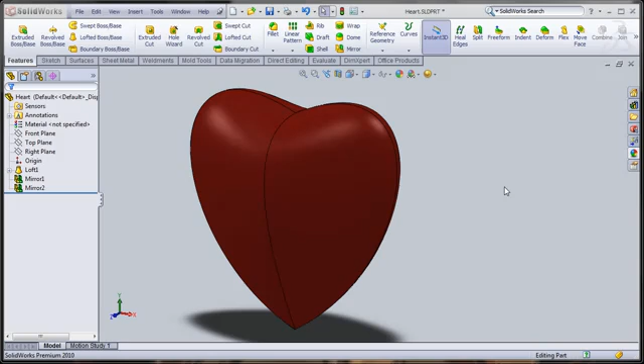Hello everybody. In this tutorial we're going to explore a feature tool called Lofted Boss/Base, and we're going to make a heart using Loft.

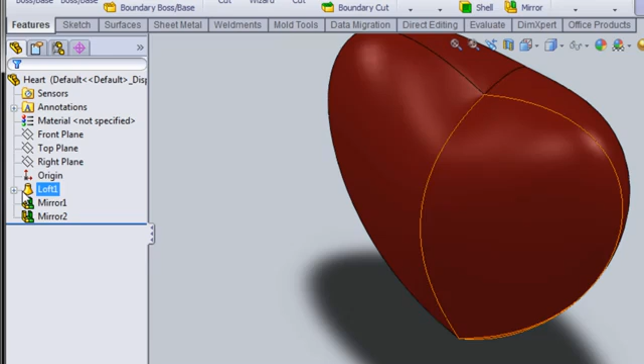As you can see, this heart here, notice when I hover my mouse over it, it really shows four different paths. As you can see on my feature tree, I have a loft, one mirror, and a second mirror. So if I suppress the first mirror, you can see the half heart, and if I suppress another mirror, you'll see only a quarter of the heart, which is nothing but a loft.

So this is the strategy that we're going to apply here. Let's take a look at how we do that.

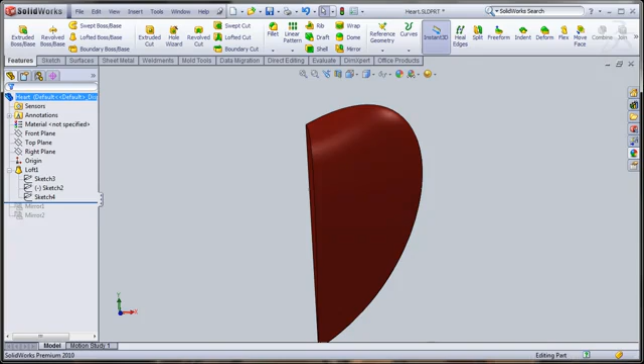I'm going to go to window. Let me just close this real quick. Go to window, and I have another part ready. Mainly in this tutorial we're going to use a front plane and a right plane. So I'm going to go front plane, and I'm going to say sketch on it.

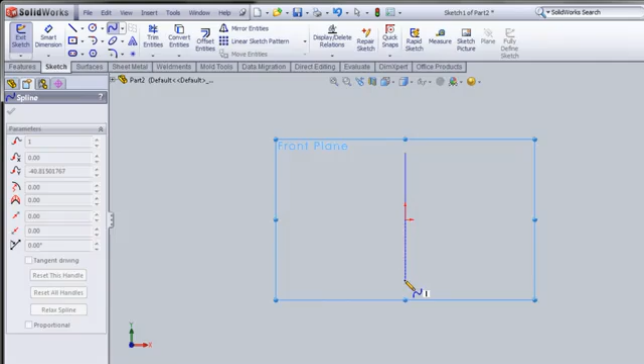Now I'm here. We're going to start with the spline tool on the top. I'm just going to draw one simple line here, and when I'm here, you see this little detail. I'm going to start pulling it like the Adobe Illustrator or Photoshop tool. I'm going to make it a little up.

Same thing I'm going to do here, like this guy too. Now in between this, I'm going to make, sorry, no center line, I'm going to make a regular line.

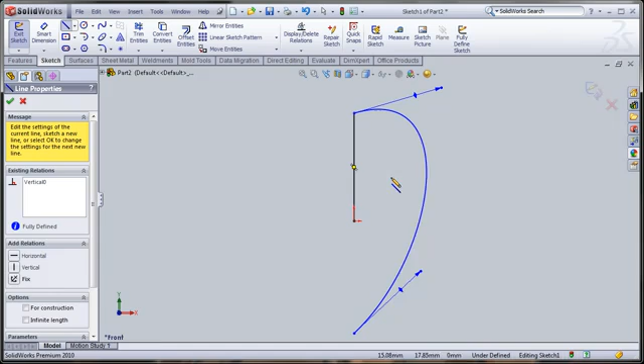Then I'm going to go right here, and we'll try to make a straight line, and there's another line. It doesn't have to be two separate lines, it could be one line straight up from here to here. I just want to make sure that it's straight and vertical.

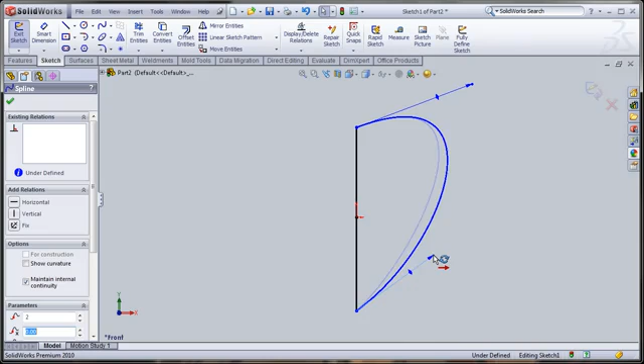Now the first part, you can take this little up here. I'm going to take a little up, and I'm going to make a little soft, gradual curve. That's one.

Perfect. Now if I make my front plane visible, we can see that we have one part of the heart shape on the front plane.

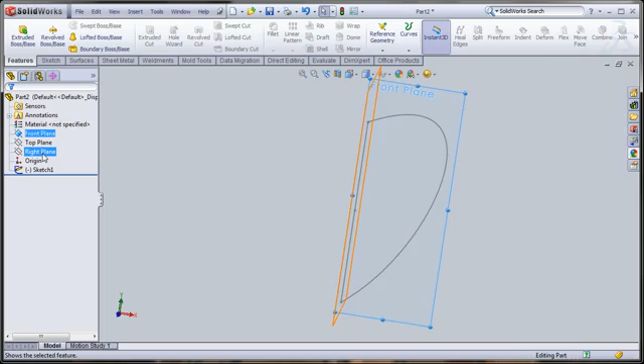Now I'm going to click on a right plane and sketch over here. This time I'll try to hide the front plane first and make the right plane visible. We're here now.

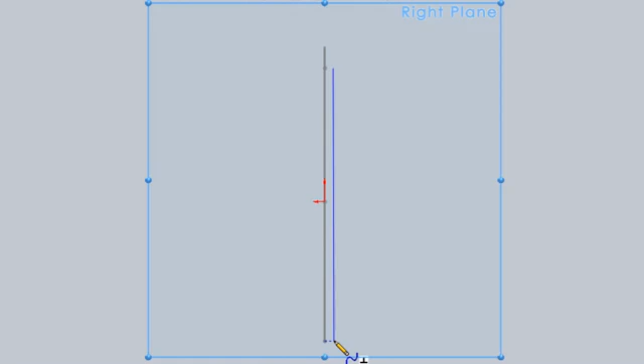I'm going to do exactly similar steps, but I'm going to start from a little away so I can avoid any accidental relationships that may develop. So I have this line created, and I'm going to select this line, holding the control button, and another two lines. Remember that line is from a previous sketch, and we are drawing a second sketch right now.

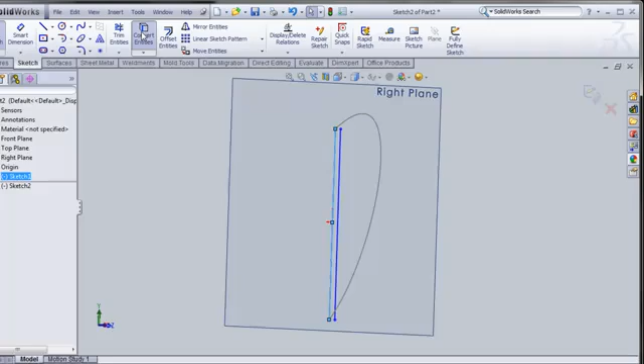I'm just going to use convert entities to bring it to this plane. Click OK. Seems like it brought it up for us. Just to double check, I'm going to hide it, and you can see we have this line ready for us.

Now I'm just going to click on the point here, click on the point here, and I'm going to say merge.

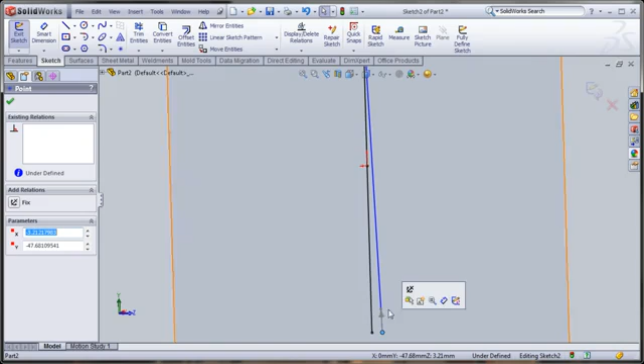Just going to do a similar thing. Before I do that, I'm just going to pull it out so it won't hide down there. Just click on merge, click OK, and now this time I'm going to make this line horizontal.

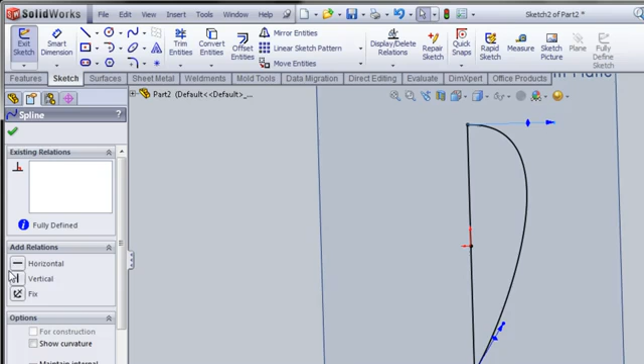So see, I'm clicking on this little handle here, first point, and I'm just going to add a relationship to that point, and it's just going to be horizontal. So it's there. Now I'm going to play with this a little bit.

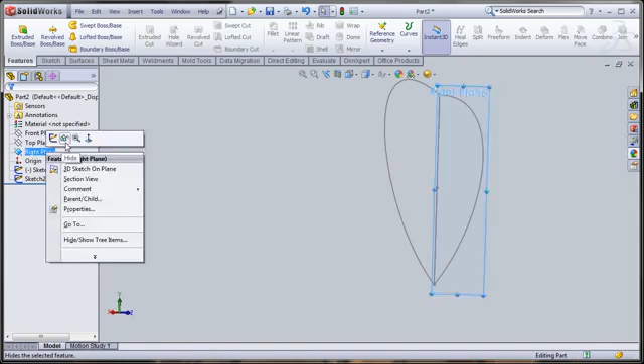Perfect. So as you can see here, let me turn on sketch one. You can see we have two different sketches, one on the front plane, one on the right plane, and it looks like this. Both the sketches have a closed profile.

Just remember, I'm just going to hide each sketch one by one so you can see this has a closed profile. Now I'm going to make it visible, and I'm going to hide sketch two. This has a closed profile as well, so make sure you have a closed profile to prepare a loft.

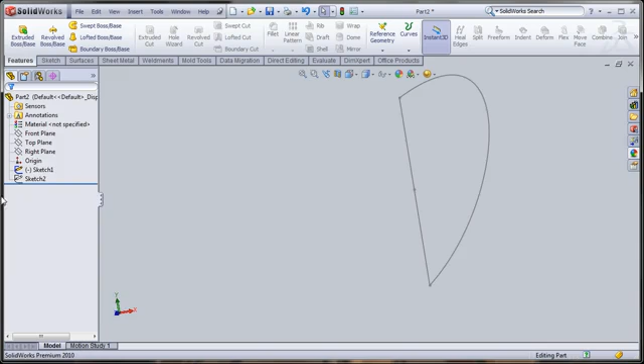In this case, now I'm going to turn on sketch two, and now I'm going to go and make a sketch on the top plane.

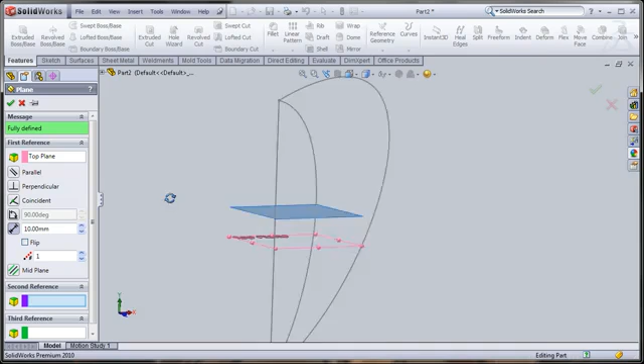I'll make a plane a little above the top plane, just so I have a better guide curve. So I'm going to go to reference geometry, plane, and use offset, and 10 millimeters seems okay to me. I'm going to click on sketch.

Now on the top plane, I'm just going to draw a spline here as well. We'll start from a little distance so I don't make any unwanted relationships on both sides. It may look like a little triangle.

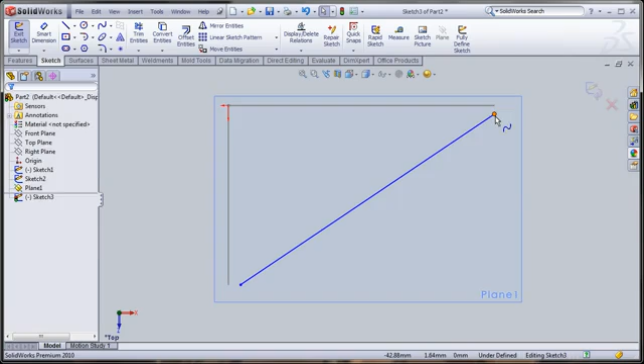Now I'm going to click on the point, holding the control button. I'm going to click on the spline, and I'll have a pierce relationship popping up on the left side. I'm going to add a pierce.

Don't freak out because it's not at the corner. It's exactly meeting the spline on the top plane, or plane 1, which is parallel to the top plane. So I'm going to do exactly the same thing, holding the control button. I'm going to select this spline and the point here, click on the pierce relationship, and click OK.

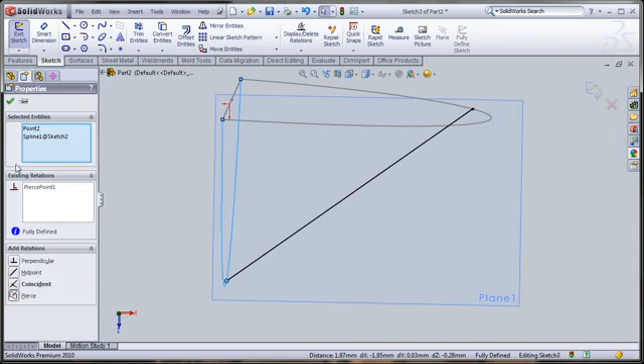Once I'm here, I'm going to click on the point, and you see these gray bars right here. There we go. I'm going to pull them and make this vertical. So that's vertical. I'm going to click here and make this horizontal. I'll just adjust it a little bit so it comes out smooth.

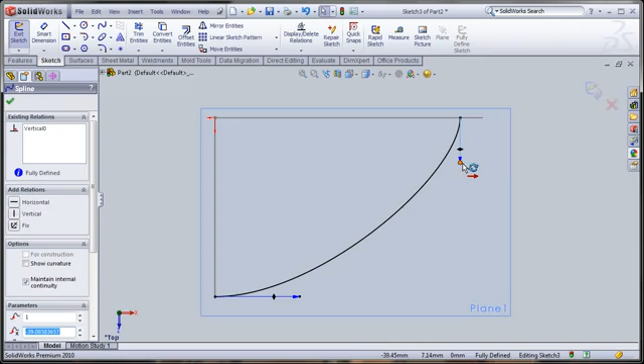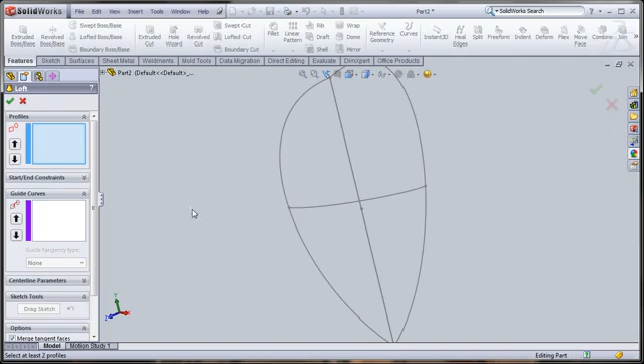Perfect. So now, as we can see, we have one guide curve which is pierced to the two sketches, and those two sketches have closed profiles in separate sketches. I'm going to hide this plane real quick, and click on the loft boss base. In the profile option, I'm going to click the first profile and the second profile. As you can see, it right away makes a surface between those two sketches.

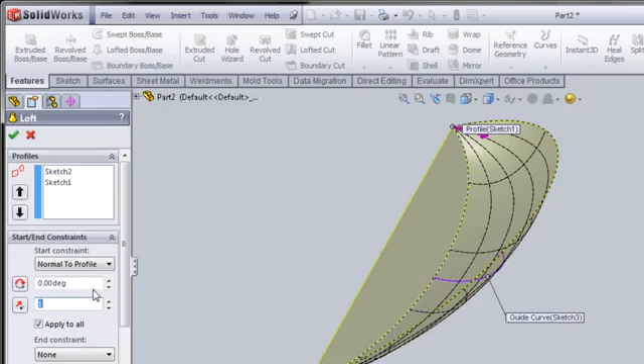Now in the guide curve option, I'm just going to click this guide curve real quick, so it gives a nice little curve. Here at the start and end constraint, I'm going to add normal to profile for both. I'm not going to change any defaults, I'll keep it as is. Make sure here in the option it's set to next guide, and change the tangency here to normal to profile as well.

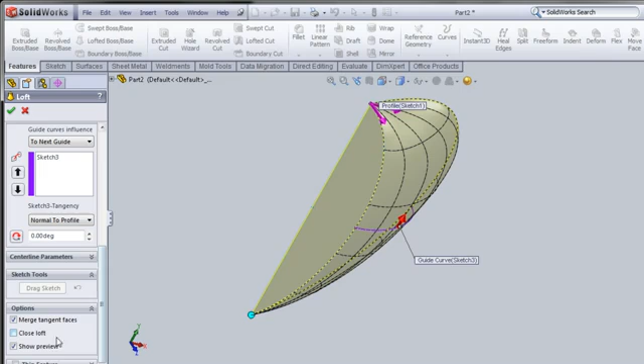Make sure you have merge tangent faces checked, and close loft should be unchecked. Click on show preview to see it. I'm going to click OK, and here we go. We have all our details ready. As we can see, the quarter part of the heart, as we saw at the beginning of the tutorial, is ready now.

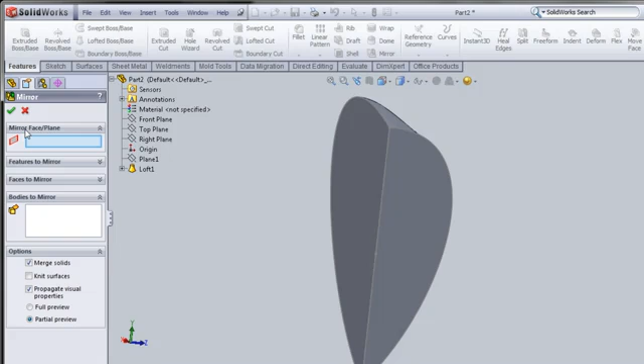Now I'm going to use the mirror feature. Click on mirror, and this time I'm just going to use one of the planes as a mirror plane. You can select the face or the plane.

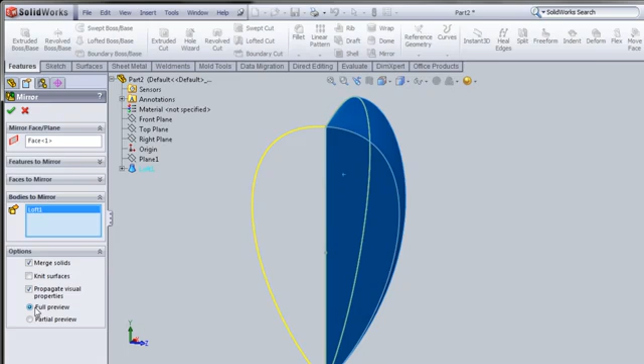So I'm going to select this face, and for bodies to mirror — there are features to mirror, faces to mirror, bodies to mirror — I'm going to pick bodies to mirror, and click on the body here. As we can see, it showed us a little preview. Make sure the merge solid box is checked, and I'm going to click full preview, that will help me a little more. Click OK, and you can see half of the heart is ready now.

I'm going to use the mirror feature again. This time on this face, I'm going to select this face. You can select the plane as well. So for example, if I don't want to select the face here, I'm going to clear selection, and select the right plane here, which is exactly parallel.

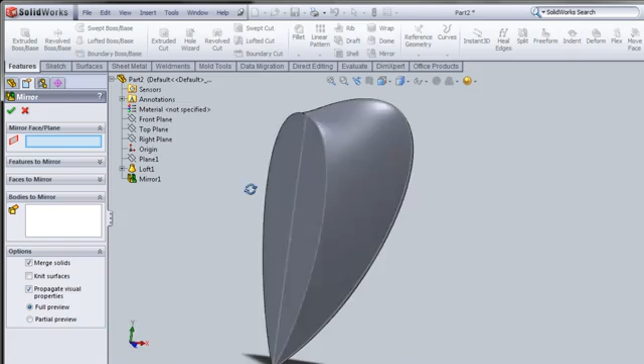If I do it this way, you can see right here, right plane. I'm going to select the right plane, and for bodies to mirror, I'm going to select this. I'm going to make sure I have merge solid checked, click OK, and there we go. I'm just going to hide these two sketches. We have a nice, beautiful heart ready.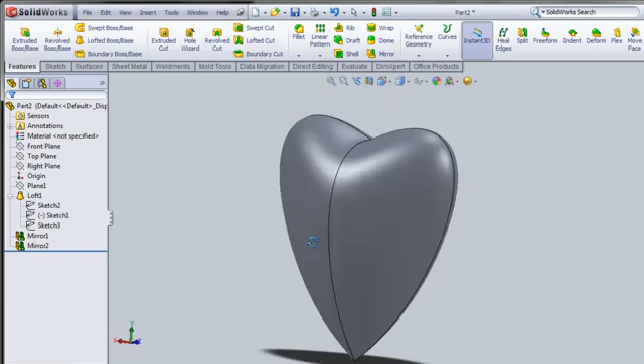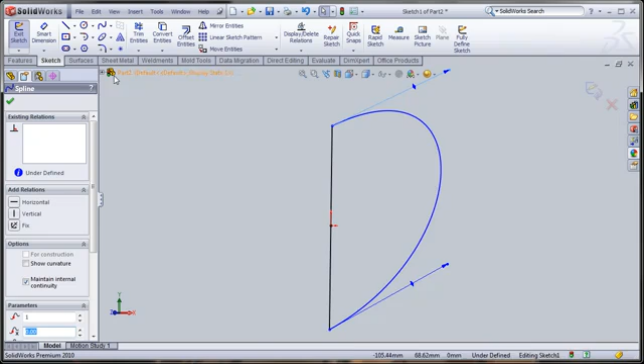Now, for example, I want to make this detail a little better. Just going to make it a little bigger out here. A little bigger heart sounds better. Make a more gradual curve here. Don't make any intense curve or too high, or else it will develop a conflict when you try to apply a loft feature.

Just going to click OK, and you can see my entire heart has been updated and it's now bigger. Alright.

Now you can go out here and apply material. I'm just going to apply one quick material.

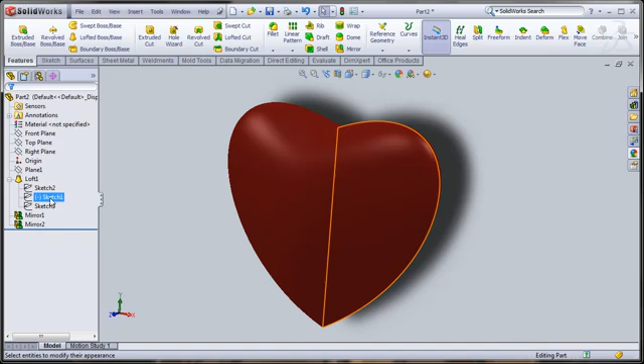And there we go. So the tutorial, with 2 mirror features and 1 loft, requires 2 sketches and 1 guide curve. That concludes the tutorial of developing a heart using loft. Hope it was informative. Thank you for watching.